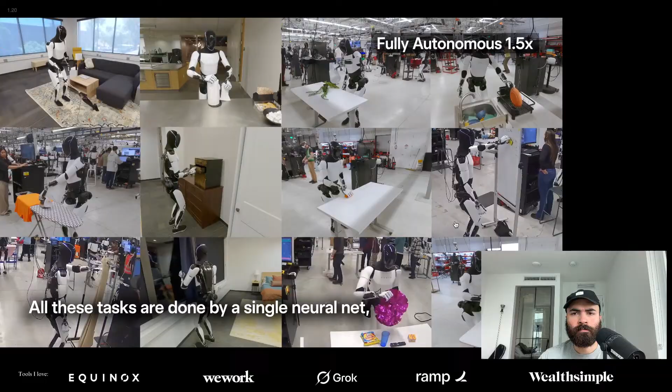Okay, very interesting. I'm not just dancing all day, okay? And they are showing this is at 1.5x, which is very interesting. But what they're showing is that by just natural language, it can start doing the work. Even the internal team must have wow moments every day. Impressive, but going to need to work on your stir if you wanted to. Yeah, the stir was weird.

True Tesla Optimus. In this new Computex 2025 keynote, NVIDIA CEO makes an important argument for why humanoid robots are likely the only universal type of robot that will work. The reason for that is because technology needs scale. Most of the robotic systems we have had so far are too low volume, and those low volume systems will never achieve the technology scale to get the flywheel going far enough, fast enough, so that we are willing to dedicate enough technology into it to make it better.

Low volume. I don't know if I understand that, but basically, I don't know exactly what it is. This doesn't make sense to me, but yeah, maybe my brain just isn't working.

But basically, the world is built for humans, and if you can just make a human robot that can do everything, that would be perfect. Otherwise, you are filling the world with too much junk. Like if you are creating a bunch of vacuum cleaners, now you are mass producing vacuum cleaners, but they can only do one task. And then for every specific task, you have to build another robot. Instead, you just need one humanoid and it can just fit into the human world and do everything that a human does.

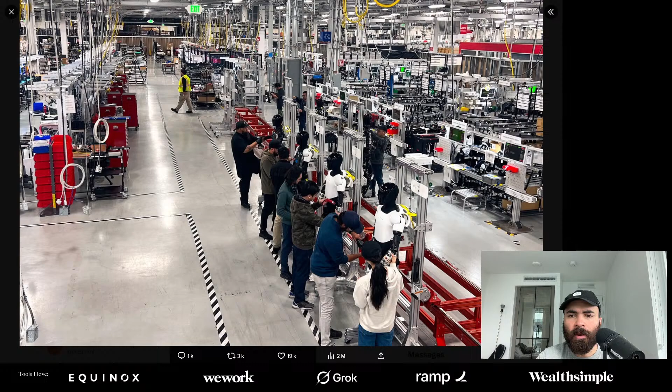Me, robot. Wow. Wow. So many robots being built.

Domo arigato, Mr. Robot. Domo arigato. Accurate actuators accelerate automation.

It's really cool how they have made the robots look so nice.

This is cool. This is cool.

Wind up racer. Wish me luck.

They grew up so fast. Merry Christmas from Optimus and his older brother, Optimus.

Silent night, electric light.

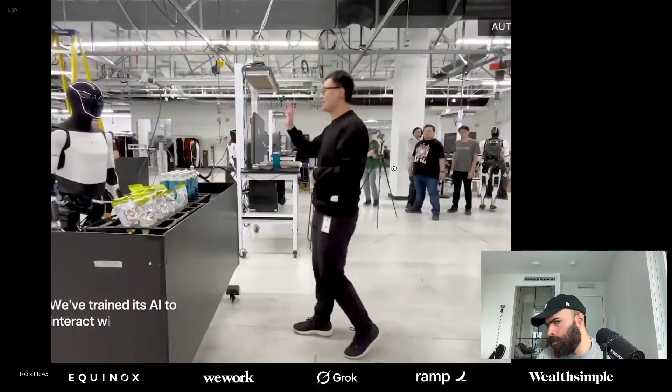Okay, really cool. Yeah, this is really cool. Like, all around the factories, they're constantly using these robots, slowly replacing things with Optimus.

Elon Musk confirms Tesla Optimus robots are fully operational. It's not a prototype, not CGI. This is happening daily in Tesla's Palo Alto lab. They walk around in the office 24/7. No one watches them. They charge themselves.

We expect to have thousands of Optimus robots working in Tesla factories by the end of this year. Production Optimus will look way more human-like than the current model. This is still very far from our final form.

Production Optimus. Wow. Oh.

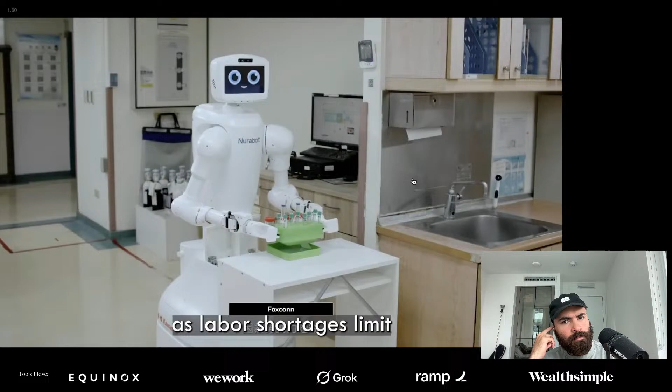The age of generalist robotics has arrived, with breakthroughs in mechatronics, physical AI, and embedded computing, just in time as labor shortages limit worldwide industrial growth. A major challenge for robot makers is the lack of large-scale real and synthetic data to train models, and human demonstrations aren't scalable, limited by the number of hours in the day. Developers can use NVIDIA Cosmos physical AI World Foundation models to amplify data.

GR00T Dreams is a blueprint built on Cosmos for large-scale synthetic trajectory data generation, a real-to-real data workflow. First, developers fine-tune Cosmos with human demonstrations recorded by teleoperation of a single task in a single environment. Then they prompt the model with an image and new instructions to generate dreams, or future world states. Cosmos is a generative model, so developers can prompt using new action words without capturing new teleop data.

Once a large number are generated, Cosmos reasons and evaluates the quality of each dream, selecting the best for training. But these dreams are still just pixels, and robots learn from actions. The GR00T Dreams blueprint generates 3D action trajectories from the 2D dream videos, which are then used to train the robot model.

GR00T Dreams lets robots learn a huge variety of new actions with minimal manual captures, so a small team of human demonstrators can now do the work of thousands. GR00T Dreams brings developers another step closer to solving the robot data challenge.

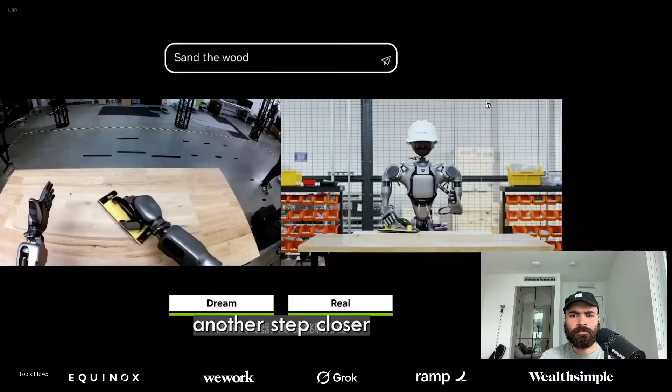Is that correct? So in order for robotics to happen, you need AI. In order to teach the AI, you need AI. This is really the great thing about the era of agents, where we need a large amount of synthetic data generation for robotics, and skill learning called fine-tuning, which involves a lot of reinforcement learning and an enormous amount of compute. This is a whole era where training these AI, developing these AI, and running the AI needs an enormous amount of compute.

That's really cool. It is crazy how much NVIDIA is launching. NVIDIA is just always in their launch mode, constantly launching something every 2 weeks, every month.

A new open model for general purpose robot behavior, GR00T Dreams, is a blueprint for generating synthetic human motion data, amplifying existing human motion data in simulation. They also announced DreamGen, a new engine that scales robot learning with digital dreams. It produces large volumes of photorealistic robot videos paired with motor action labels and allows generalization to new environments.

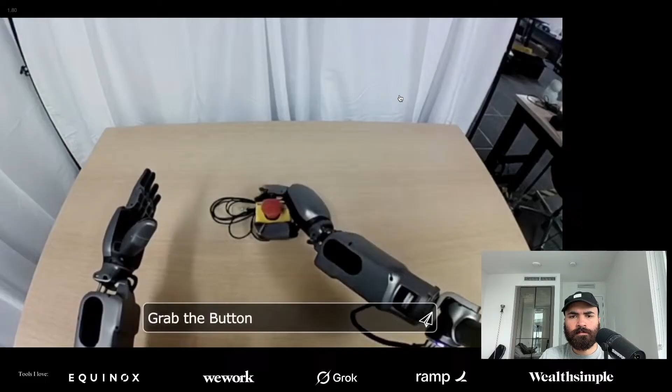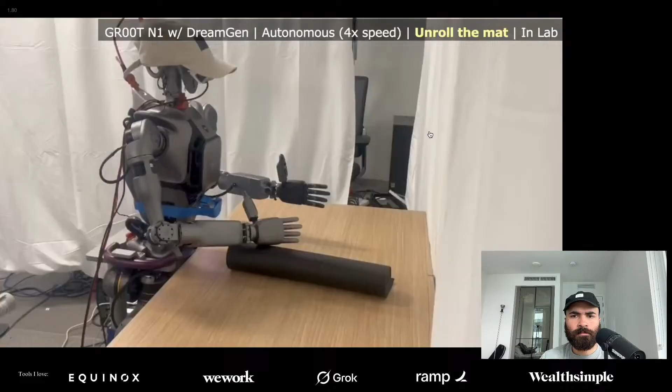So it's about the fact that that makes sense. You are basically using natural language to understand what the action could be, and translate that word into actual movement without any specific teleoperation. This is like hard coding. This is similar to natural language, similar to how LLMs were built. Earlier, chatbots were hard coded, now they are dreaming, and that's exactly what's happening. Like earlier, using teleoperation, every action was hard coded, but now it's dreaming. Now it's thinking.

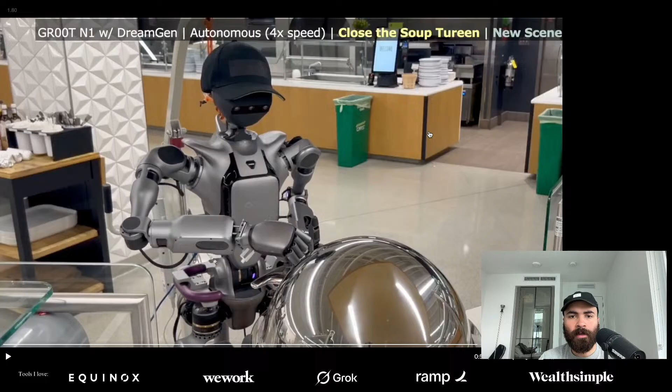Really cool. Future House made its first major scientific breakthrough identifying a new treatment for macular degeneration. Robin AI agent generated hypotheses, designed experiments, and analyzed data to find a suitable drug for the condition.

Okay. Singapore's Sharpa unveiled Sharpa Wave, a lifelike robotic hand. Features 22 degrees of freedom to balance dexterity and strength. Each fingertip has 1000 plus tactile sensing pixels and 5 millinewton pressure sensitivity. AI models adapt the hand's grip and modulate force.

TikTok parent ByteDance launched Bagel, a unified multimodal model. It can think and reason across text and images, generate new images, edit, including inpaint and outpaint them in different ways. It can even add motion.

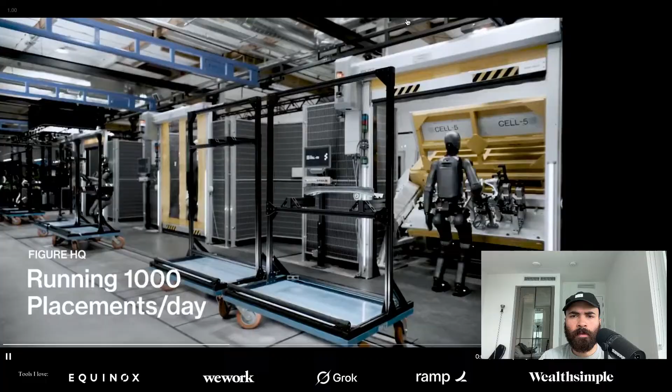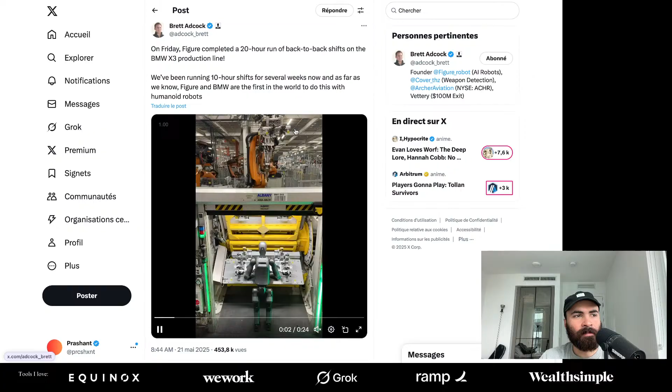Running 1,000 placements per day. This is actually very interesting what Brett Adcock is doing. So what Brett Adcock is doing is that they are not targeting how cool their robot could be. They're looking at straight integration, that our robot must be in factories, must be doing the repetitive works. Let's get it doing work and we can figure out, and that's the most important thing: can we actually replace a lot of human labor with robots? They are not looking at aesthetic, they are not focused on making it look like they fixed the robot's walk, but they are really focused on what value we are giving to our customer, to our client. It's less about the aesthetic, and that's where they can win, that's where they can also win that okay, we are already working with BMW, which is a Tesla competitor, and Tesla is right now only focused on their own company, their products, so they are not gonna go and give their Optimus to BMW. So okay, let's go to BMW.

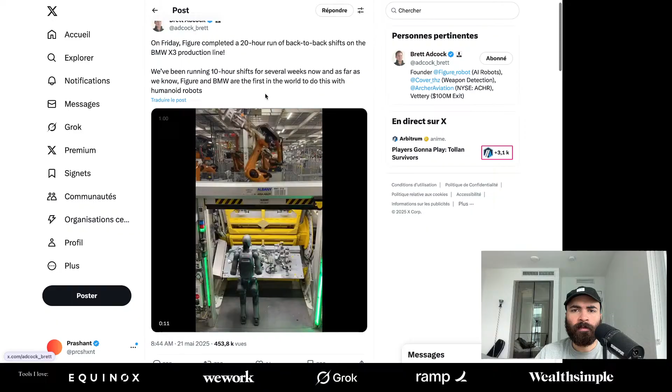We've been running 10-hour shifts for several weeks now, as far as we know. Figure and BMW are the first in the world to do this with humanoid robots. The results speak for themselves. Another great milestone. Would you mind posting some real-time videos? The Humanoid Hub will look into that. Let's look at Brett Adcock and see. Okay, by the way, this is all the stuff he's working on: Figure, Archer, and Cover.

F03 is officially walking. This is the most advanced hardware I have seen. Really cool, really cool. As they have a fleet of robots deployed at BMW, they're also constantly upgrading the robots and making sure of that. And there's another team that is constantly working on the aesthetics and working on the next version of it that looks slimmer, more humanlike, and can do better stuff.

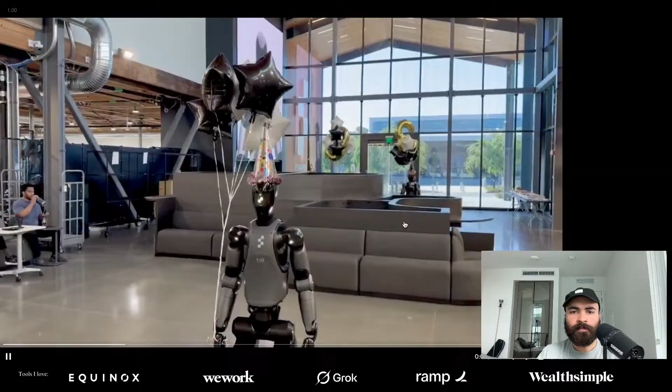In 25, Figure is focused on deploying autonomous humanoids into the real world. That means a massive push on AI autonomy, integration, and data execution. We recently hit a major progress point, more to share in the morning.

Massive push on AI autonomy, integration, and data execution. So yeah, because Brett's entire company is Figure, there is way more updates from Figure's side than from Tesla Optimus' side.

Figure's culture of getting stuff done. Also, some of us will be coming in Sunday to keep cranking. You can't course correct a company to do this, but you have to set these values at the beginning, or in extreme cases, cut everything to get there.

Humanoids are the iPhone of AGI.

Alright, yeah, this is so cool. Because his entire company is Figure, humanoid, there is way more insights coming from Brett's side. And if you want to learn, this is a better place.

It's a generalized humanoid robot. You just ask it to walk your dog, take care of your house, watch the kids, teach the kids, cook dinner. I think everyone will want one. My guess is 20 billion humanoid robots are there.

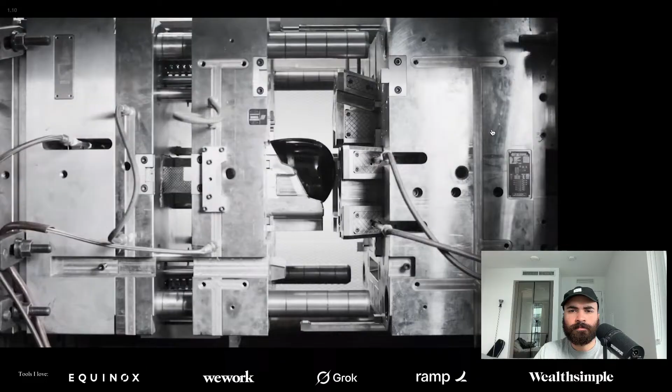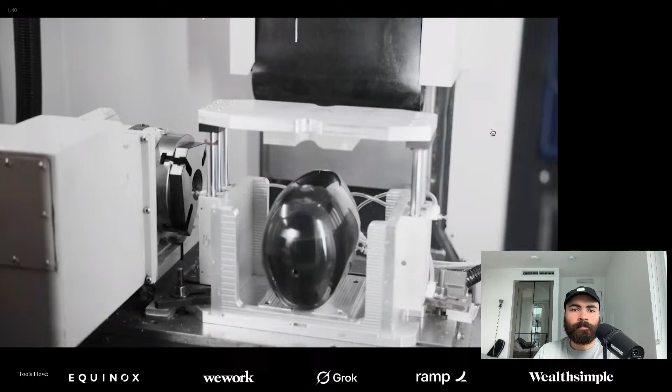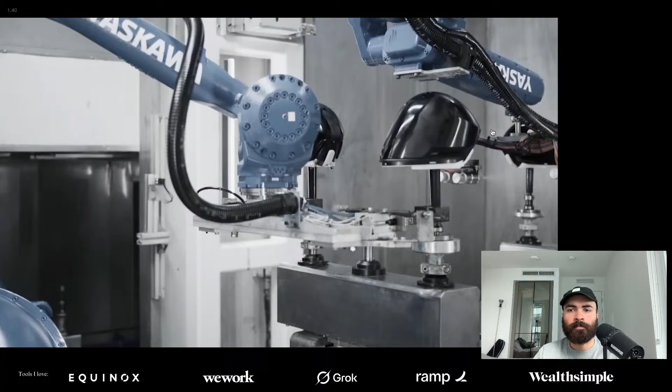Oh, this was a good video. Wow, and that was just the head.

Showcase is part of their automated volume production line, initially designed to produce 12,000 robots per year. Figure plans to scale the humanoid robot fleet to 100K within 4 years. The robots are coming.

Anthropic researcher: the really scary future is the one where... how many followers? 55K, wow. Chronicles of Optimus and other humanoid robots, technology, business, and social dynamics.

The really scary future is the one where AI can do everything except for physical robotic tasks, with some robot overlord telling humans what to do through AirPods and glasses. Carolina, head of robotics at Google DeepMind.

Surprising results and the level of generalization achieved by combining Gemini's reasoning module with a dexterous learning architecture. There's other examples where you put it...

So there's different teleoperation examples. One is where you actually sit in front of the robot, so you have direct visibility to what the robot is doing, and you move the robot arms - literally you're puppeteering the robot. And there's other examples where you put on a VR set and gloves, and you pretend to be the robot and you move this stuff.

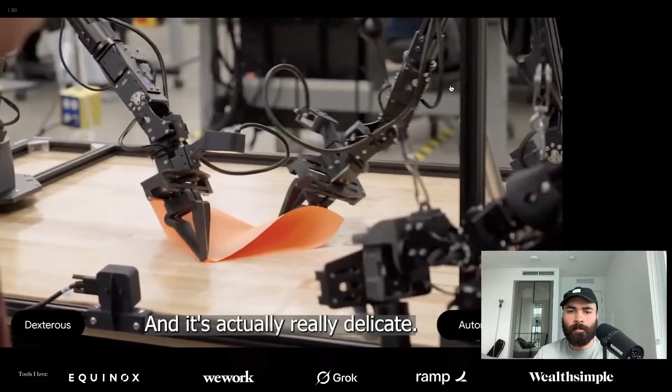Same with the origami example. We had no idea if this was going to work, but we tried it, and it was surprisingly good. It's actually really delicate — it has to fold every part of the paper in the right sequence. If anything goes wrong, it loses its way and has to restart, same as if a human was doing it.

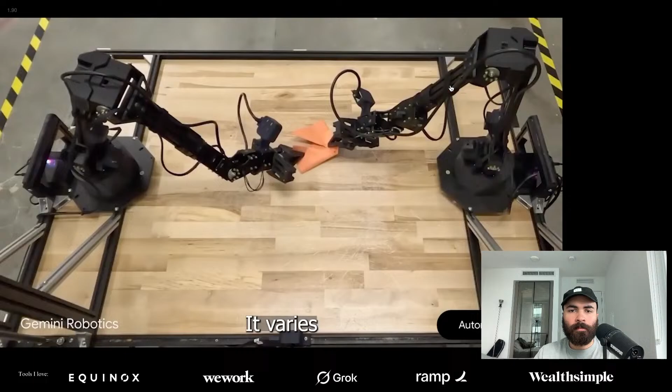How quickly does it happen? How many origami foxes does a robot need to watch a human fold before it can do it itself? It varies by the complexity of the task, pretty similar to humans — the more complex the task, the more practice you need before you can master it. There are tasks you can master with just about 100 examples, while tasks like the origami fox take about 1,000 examples.

Wait, so people have to fold origami foxes while pretending to be a robot 1,000 times? Yes, that's right. Okay, that is incredibly amusing to me.

We're trying to reduce it as much as possible, and we're able to get quite a few tasks down to just a dozen examples, and some tasks need no examples at all. In a lot of cases we tested, like playing with a robot and asking it to do pick-and-place tasks with completely new scenarios, you don't have to teach it again. This is expanding and getting more complex — for example, with tiles, you can just reason about their positioning and work with them.

What about pack lunch? That one is more complex because it's a long sequence of tasks, about 5 minutes, and you're picking up very deformable things like a Ziploc bag and doing very delicate work. So the more delicate the task, the more examples you need to see of it.

So if the robot isn't shown many examples, does that impact its generality? Only to a degree. One thing we make sure to do is collect data across thousands of examples without placing heavy emphasis on any single new task. If you do want to do the origami task, you specialize it for that, and that affects the generalization of today's models. We're hoping to get to a state where you can teach it any new task and the generality remains intact, but today there's a trade-off.

Very interesting. Redefining robotics — that was a really good one.

Sneak peek of foundation robotics: a consumer goods manufacturing use case.

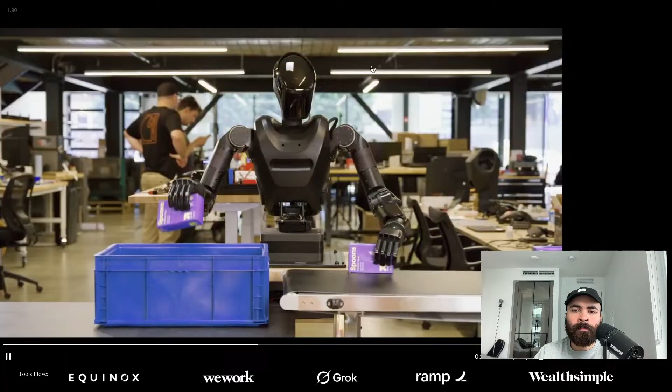Egodex is Apple's large-scale egocentric dataset for dexterous manipulation, including frame-by-frame 3D pose annotations spanning 829 hours. The open dataset was recorded using Apple Vision Pro and annotated in real-time with high-fidelity 3D pose estimates.

Unitree hosted a 1-hour live stream demonstrating the G1 robot performing fighting moves in response to voice commands.

Really cool, really cool. Beyond Imagination, a humanoid robotics startup co-founded in 2018 by Ray Kurzweil, is in talks to raise 100 million in Series B funding led by Gauntlet Ventures, targeting a 500 million valuation. The company unveiled its humanoid prototype in 2021.

Its articulate fingers, hands and wrists are very human-like. Besides being able to pick up large weights, it's fine enough to do a pinch of salt.

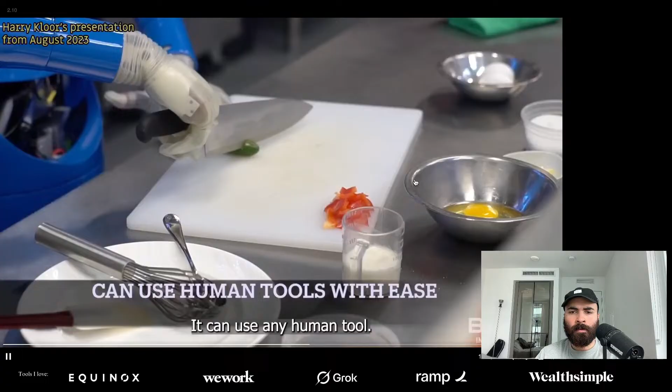It's strong enough to push that drill through as many times as you want, and it can work around a hot stove. This test was very early, from November 2021, and we had tested it at true pace. This is a big...

Beyond Imagination — well, that's great, except it's 2025. So what advancements has the company made in the past 4 years? You were showing a video that's 4 years old. That's the most recent public update from them as far as I know. Investors betting big makes me think they might have made more progress since then.

How the Gemini-powered robot, without prior training, performed a slam dunk with an unfamiliar toy basketball hoop, demonstrating surprising generalization from Gemini's conceptual understanding of the world.

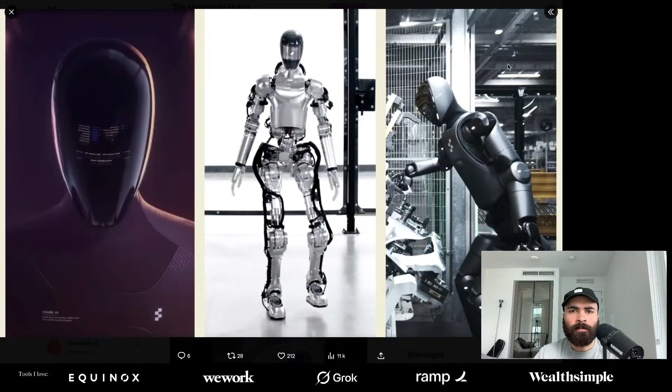Figure just turned 3. Wow, this is really cool. 1, 2, 3. Yeah, 2 looked pretty crazy, like way Terminator-like, but very shiny metals. Use of very shiny metals.

It went from inception to taking first steps in 18 months, and then to completing a 20-hour run on a car production line in another 18. Can maintain execution pace.

Mecha Combat Arena will be broadcast live on Chinese national TV channels, China time. I think Unitree was the one which was like super cheap. MMA style Mech Combat Arena.

As IO merges with OpenAI, Jony will assume the deep design and creative responsibilities across OpenAI and IO. I really hope to see Jony's design sensibilities brought to a humanoid robot.

Express the essence of something, its purpose, and its role in our life. I actually think that something I feel conscious of is that generally in our industry, joy and humor has been missing, and that's something that weighed on me. And yeah, you clearly understand joy and humor looking at his socks.

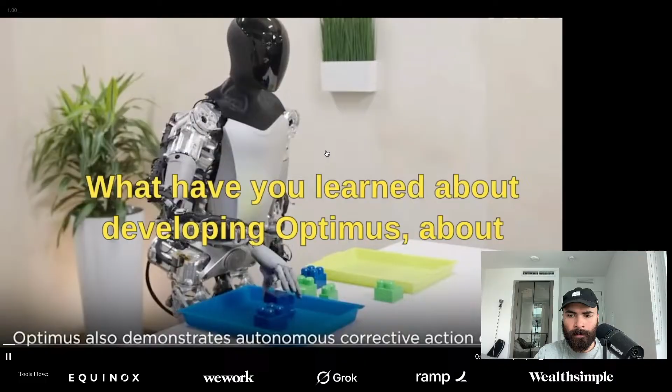What have you learned about developing Optimus, about applying and integrating this kind of real-world AI into the space of robotic manipulation, humanoid robotics. What are some interesting, tiny or big things you've understood?

I was surprised at the fact that we had to develop every part of the robot ourselves. There were no off-the-shelf motors, electronics, or sensors, we had to develop everything. We couldn't find a source for the electric motors for any amount of money. It's not just inefficient or expensive, there simply wasn't one. Everything had to be designed from scratch. We tried hard to find anything suitable, there are tens of thousands, hundreds of thousands of electric motor designs, and none of them were suitable for a humanoid robot. None. So we had to develop our own design specifically for a humanoid robot.

How hard was it to design something that's manufactured to be relatively inexpensive, if you compare the cost to other very expensive robots? It's designed to be manufactured the same way we make a car. Anything else would be less industrial. It should be, because if you look at the mass of the robot, it's much smaller, and the robot has more actuators than the car. But the actuators are kind of interesting, the human robot fingers. Optimus has really nice hands and fingers.

The entire machinery of the learning process, end to end, it's just a different set of controls. Optimus will figure out how to do what you made.